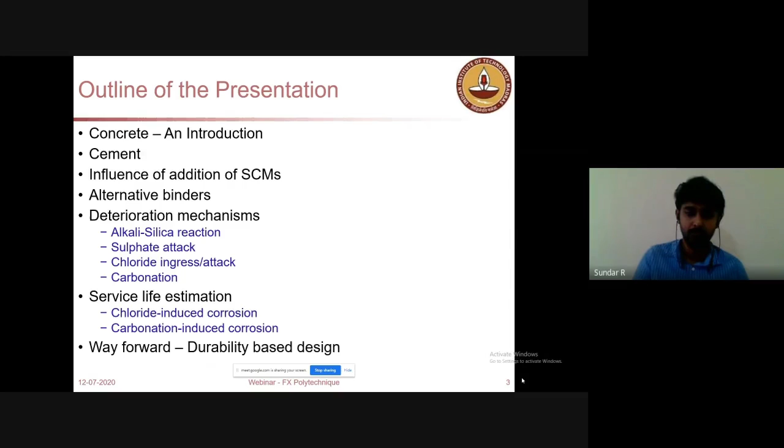Now going to the presentation. This is the topic that I will be presenting today. This outline will be followed throughout the presentation. There will be an introduction about what is concrete and how it is being used widely in the industry, and then I will tell about the most important material in concrete, which is cement. Then I will explain how the influence of additives like fly ash and slag have been improving the properties of concrete, and then I will give some insight on the deterioration mechanisms that affect concrete in the long term, and then I will give some information about service life estimation, how it's done and how it will be useful in incorporating durability-based design of concrete structures.

So let us see, when a trainee engineer enters a site, maybe the first job you will be doing will be concreting, because I got that when I went as a site engineer, and I used to wonder what were the things I should know before going into the concreting business when I joined as an engineer. I would know there will be formwork and it will have steel reinforcement, then I used to check some cover blocks. These are some mandatory checks, like checking the formwork, checking the cover blocks. Beyond that, we will see the batching of concrete, whether it is done properly with weight batching or volume batching, and we will ensure during compaction that vibration is being done. Then after a while, maybe 7 days or 28 days after concrete placing, we will find the cube compression. So this is the routine duty of a concrete engineer at the site level.

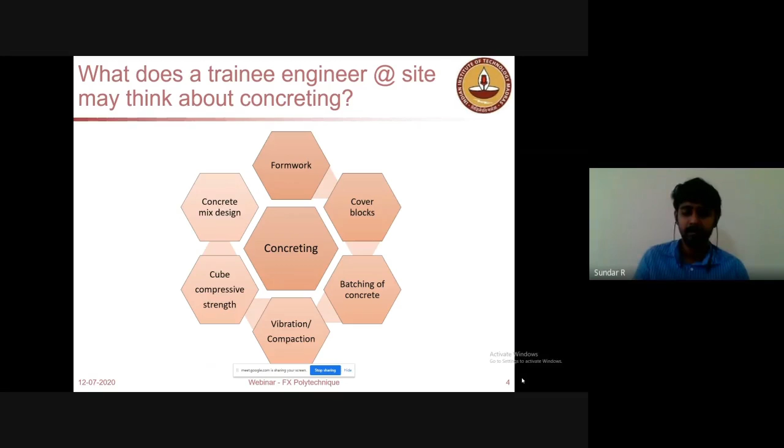So beyond that, what should we know about concrete? When you are an engineer at site, beyond these regular things, you should have an idea about how concrete has evolved over a period of time, and what you should be considering while doing the concreting and during the curing process also. This is very important because concrete is going to last for a long life period. Buildings designed nowadays are for more than 50 years or 100 years. So you should know how durable the concrete is that you have been placing at the concrete element that was designed. Let us move on to the next slide.

Here, concrete is an all-purpose building material. Wherever you go, you will be able to see concrete. Whether it is a power plant, a bridge project, precast elements, or a residential building complex, wherever you go, you will be working with concrete.

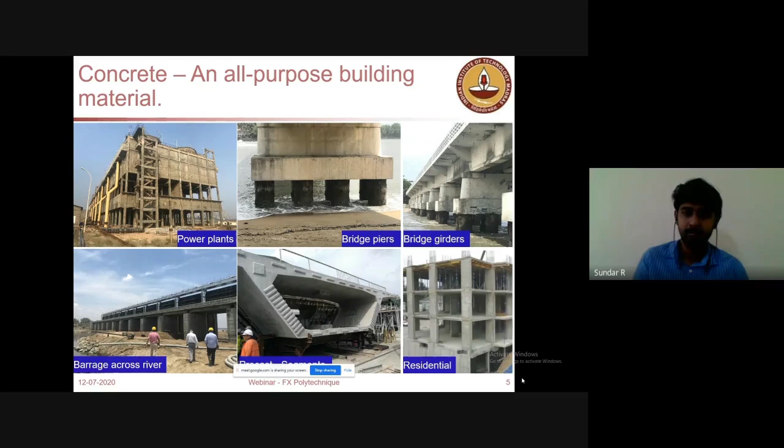So there is no escape in that, especially in a developing nation like India. Concrete is going to be the ultimate building material, which is cheaper, and it is an easy material to make and then place at the site, even with an unskilled labor force under the supervision of an engineer. So why is it a first choice material? As I said, it's a low cost material which could be easily made at site itself.

And nowadays for quality control, we have precast and RMC plants also. So what do they do in concrete? Concrete is a composite material which has a binding medium, and there are fragments of aggregates, so that gives the strength component for the concrete.

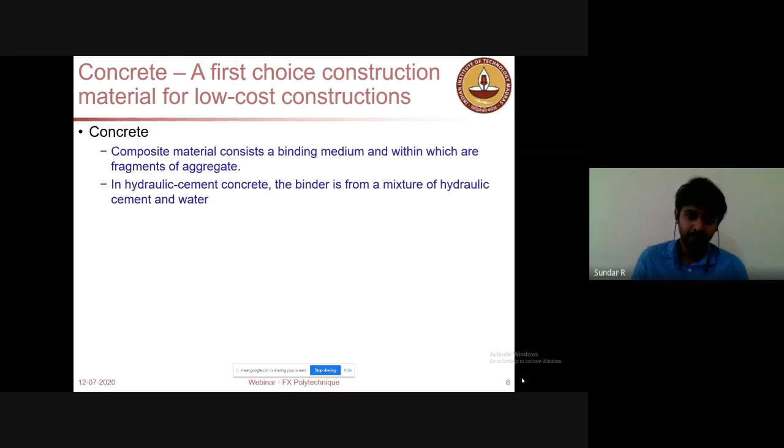And in hydraulic cement concrete - why do I say hydraulic cement concrete? Because the cement reacts with water, and with that reaction the cement paste forms a matrix around this aggregate. So that composite medium gives you concrete which has sufficient strength and durability properties for the necessary service life of the structure.

So what is this binding medium? Over a period of time, the cement industry has evolved a lot. For a longer period, you would have seen this ordinary Portland cement, called OPC. This OPC has been used for a longer period, more than around 200 years, from the 1800s. So this ordinary Portland cement had been the first choice material as a cement.

Then at the end of the 1990s, at the start of this millennium, around 2000, we had some guidelines proposed for reducing carbon emissions. So to reduce the carbon emissions, we went for supplementary cementitious materials. I will tell more detail about it in the next slides.

And then there are now alternative binders. I will explain about that also in a few moments.

And aggregates - there are two different components of aggregates, like natural aggregates, which are now in short supply. You would have heard that fine aggregate and coarse aggregates, which are being quarried from natural resources, are receding. So to save that, we are even going for taking aggregates from demolished structures, as well as manufacturing some aggregates like quarry dust, and manufactured coarse aggregates from recycled aggregates.

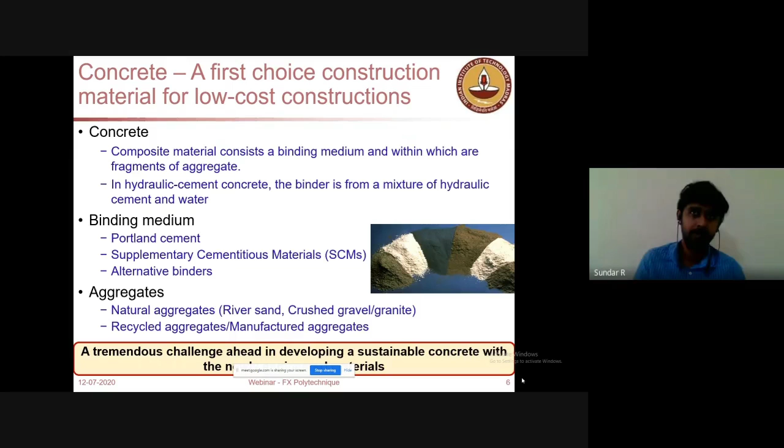So these are manufactured. There are tremendous challenges ahead in developing sustainable concrete with newly engineered materials. So the material is getting a lot of changes. It is being engineered to get maximum output through a lot of combinations and permutations. So we are doing a lot of research on how to make this concrete sustainable as well as efficient. That is what we are going to see now.

So why did we come across SCMs? Why do we have to use these SCMs? If you see, cement production has been accounting for almost 8% of the world's CO2 emissions. This carbon dioxide emission has been a huge challenge, contributing to global warming. So as cement producers, as civil engineers, we should be concerned about it, because we use cement a lot, and we are contributing to almost 8% of the world's CO2 emissions.

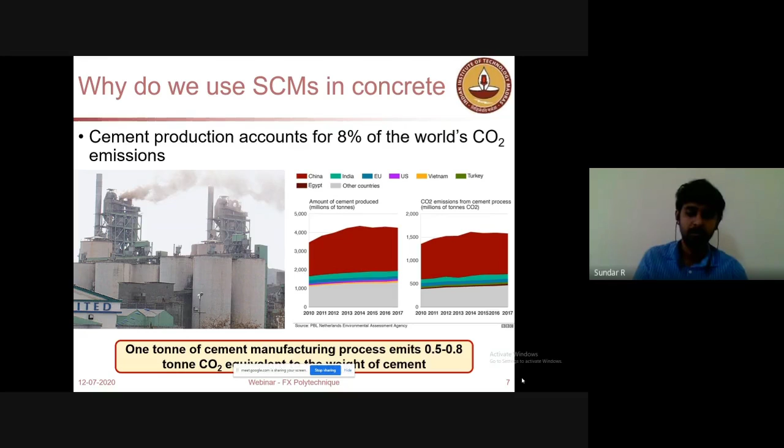Also, if you see, 1 ton of cement manufacturing emits almost 0.5 to 0.8 tons of CO2. This is a huge amount. So you have to see how you could reduce this, because for every ton of cement you manufacture, you are expelling about 1 ton of CO2. That much amount of CO2 is getting out from cement industries.

So what are the choices? When you see how cement manufacturing contributes to CO2 emissions, there are three important processes. During the process, the limestone, which is the major raw material of cement, expels CO2. When you treat the lime at a higher temperature, the CO2 from the limestone, that is calcium carbonate, will expel CO2 and become CaO, lime, and then form calcium silicate during cement production. That process itself emits almost 50% of the CO2 during cement manufacture.

And also thermal emissions correspond to the fuel that has been added in the cement industry, added to the cement kilns, giving almost 40% of the emissions of CO2 from the process. The remaining processes are very minimal, like quarrying, transportation, and grinding.

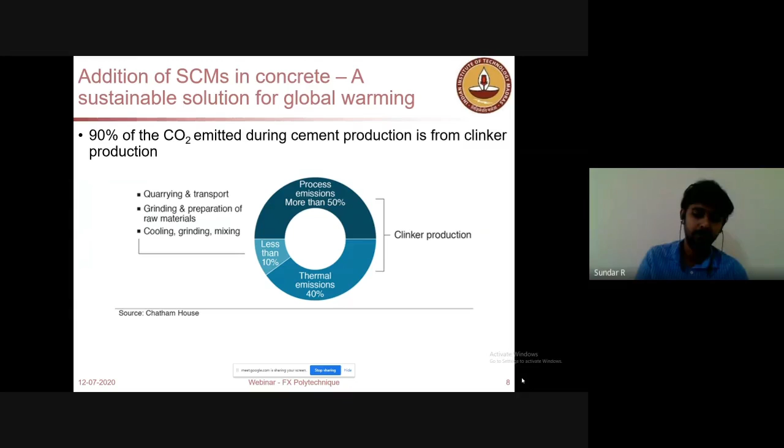So those are very minimal. When you look at this, you could see almost this process itself is contributing to 50% of the emissions. And you can see thermal emission also contributing a lot, but that will be dealt with by using some alternative fuels. But however, when we can, as material scientists and civil engineers, we can have an idea about reducing CO2 by reducing the clinker content through addition of SCM.

So when you add SCMs, you could reduce the clinker. The clinker is the base component of the cement. During the cement manufacturing process, you will get clinker as an end product. That clinker will be ground to cement. So when you reduce the clinker content, you will eventually reduce the CO2 emissions. That is one of the sustainable solutions for the global warming problem that we have been creating.

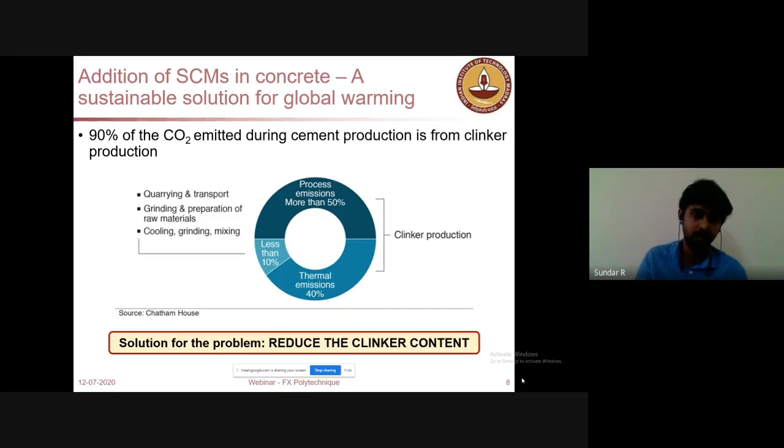So due to that, what we did, so there are a lot of industrial byproducts or waste materials. For example, fly ash is one of the major sources of industrial byproduct or waste material, which is added into concrete or cement as a supplementary cementitious material.

There are tons of fly ash emitted every year through thermal power plants. Even Thoothukudi has a thermal power plant, so you could get a lot of fly ash from the thermal power plant there, and you could use that in cement industries nearby, like in Tirunelveli where you have a cement plant. So from the cement plant in Tirunelveli, they'll get some fly ash from Thoothukudi, and then they will grind it with the clinker they have been producing, bringing down the clinker content, and they produce Portland Pozzolana Cement, PPC.

So you would have heard this term PPC also. Then there's slag cement also - if you go to steel processing industries, you will have slag as a byproduct, and that also has some reactive silica and alumina that will react with the cement hydrated phases, producing calcium hydroxide and calcium silicate hydrates, which are the binding products in the concrete or cement matrix. Similarly, we have waste products like clay and second quality limestone present around the limestone quarries, which could also be added to the clinker to improve performance.

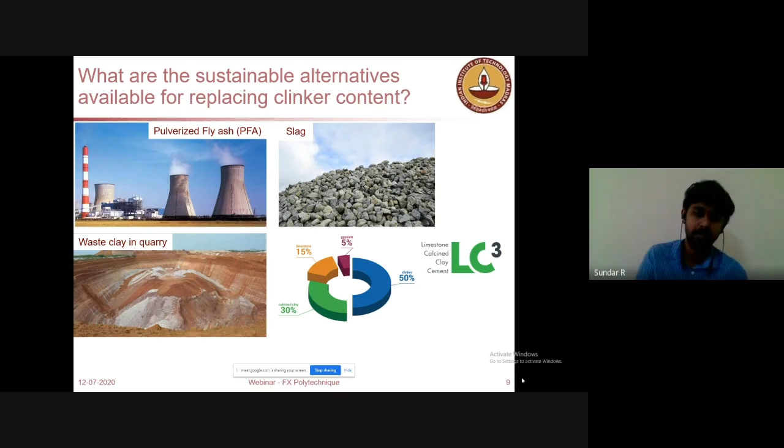So these are some of the research that has been going on, and some positive results have emerged from this method of substitution of SCMs in cement production.

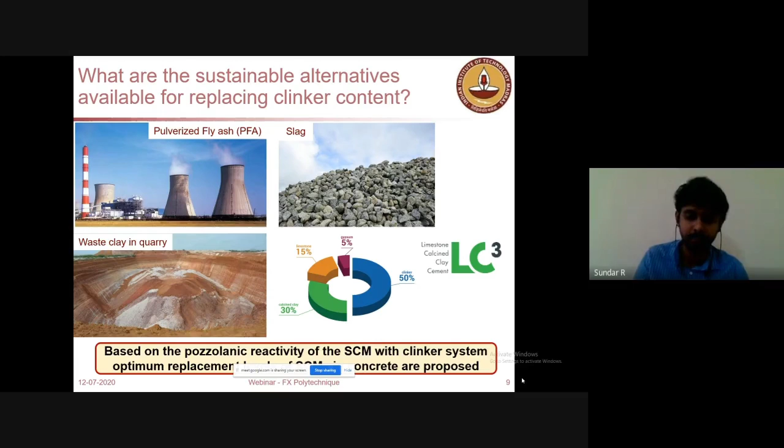So pozzolanic reactivity of the SCM is about how much reactive silica and alumina is present. If you go back and see the chemistry of cement, you will see calcium, silica, and alumina are the three major elements which react and form the binding product. So the presence of this reactive silica and alumina, and their proportion in the SCMs, are the governing factors for deciding how much optimum replacement can be used. That has been researched a lot.

And so now you have to have an idea about how many types of cements there are. When you go to site as a civil engineer - when I went 10 years before to the site, I knew OPC and probably to a lesser extent about PPC, and I didn't know what the difference was. Now I just wanted to give you information about how different they are and how you should be able to make a decision when you come across these cements on site in the future.

So if you see this ordinary Portland cement, now the ordinary Portland cement production has been reduced a lot by the cement industries. Now the proportion of OPC in the market is almost 25% only. This is the traditional cement manufacturing procedure. You will get limestone from the quarry, and clay from nearby quarries, and you take both and go for a process called calcination.

So preheating will be done. Then after the preheating, the clinkerization will happen in the cement kilns at a very high temperature of 1400 degrees centigrade. That is a very huge temperature, and it needs a lot of fuel to burn, which corresponds to a lot of CO2 emission also. So then finally the clinker will have these bogue compounds. In concrete there are bogue compounds which are tricalcium silicate, bicalcium silicate, and tricalcium aluminate. Bicalcium silicate and tricalcium silicate are the major ones - C3S and C2S are the major raw materials used to bind the cement, used as binding material.

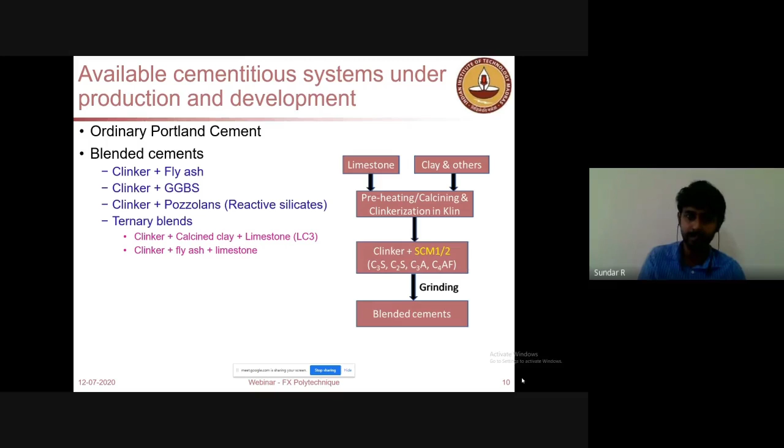Similarly, when we go for blended cements, these are cements like PPC and PSC, like Portland Pozzolana cement with fly ash, and Portland slag cement with GGBS. Additional pozzolans are also available, like volcanic tuff, which are also having reactive silica, so they also will be used for pozzolana cement.

And we have some, so these three are binary blends, and this is the ternary blend which is having 2 SCMs. So you could see either one or two SCMs added to the clinker after the regular cement manufacture process, and then it will be ground to form the blended cement. So this is how blended cements are made.

And there are alternative binders. These alternative binders are made up of materials which are out of the regular manufacturing process, or the process involved in making concrete will be different. So somehow there will be a difference either in terms of process or in terms of material while producing a binder. Here, if you see this geopolymer, you would have heard this word quite frequently in the last 10 years, and maybe you will be using some geopolymer applications later. So here it will be mostly devoid of OPC.

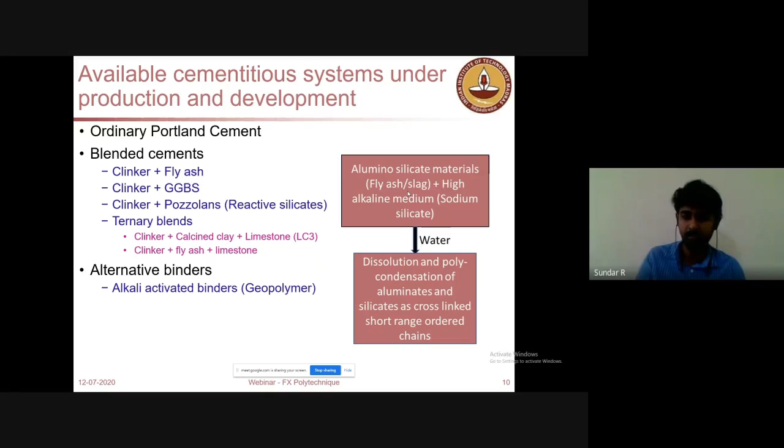So they mostly use fly ash and slag, and then they will keep them in an alkaline medium. That alkaline medium in combination with these aluminosilicate materials, essentially slag and fly ash, will polymerize and then form this cementitious material, that is geopolymer, and calcium sulfo-aluminate cement.

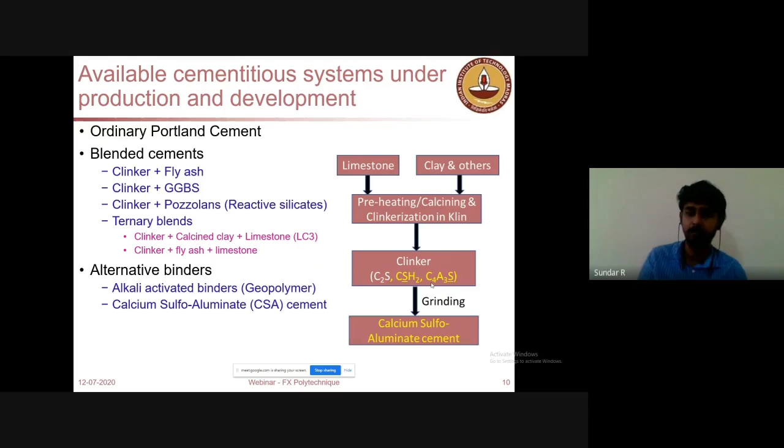Here also the raw materials are almost similar, but the process of cement manufacture will be different. Like Ye'elimite is one of the products, like C4A3S is Ye'elimite. So the phase compounds formed in CSA cement are different from what is formed in OPC. This Ye'elimite is produced at a much lesser temperature, and due to that, much lesser heat will be generated through the fuel. So that's how the cement manufacturer will have lesser CO2 emissions. So that is one suggestion for alternative binders.

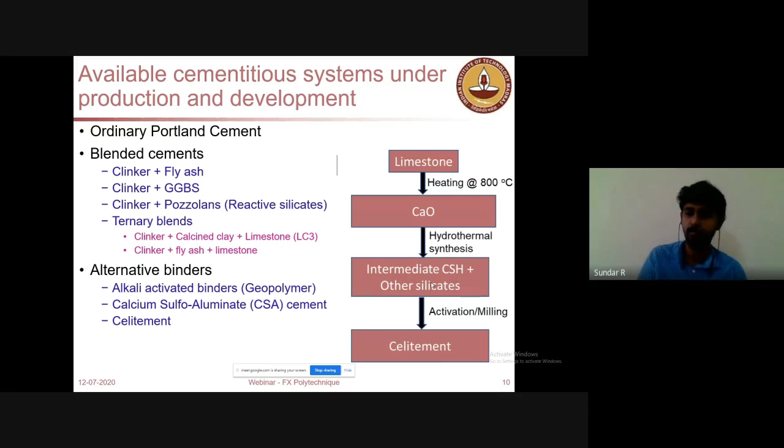And Celitement, this is another cement where the entire process will be different. Instead of clinkerization, they will go for autoclaving, that is a hydrothermal process where cement will be manufactured. Similarly, magnesium silicate cements are also there, where the raw material will be entirely made up of magnesium silicate.

So until now, you have seen cements based on calcium and silica. Here, the cement raw material is a magnesium silicate, which is a green colored rock, something like olivine or serpentine, which are available in the earth's crust, somewhat lesser than calcium, but still widely available. So that could be one of the alternative cements.

So when you come to some special purpose cements, you would have heard something like sulfate resistant cement, or even rapid hardening cement. These are special purpose cements that will be useful in some specific applications, not everywhere. It could be manufactured in a limited content. So you have a wide variety.

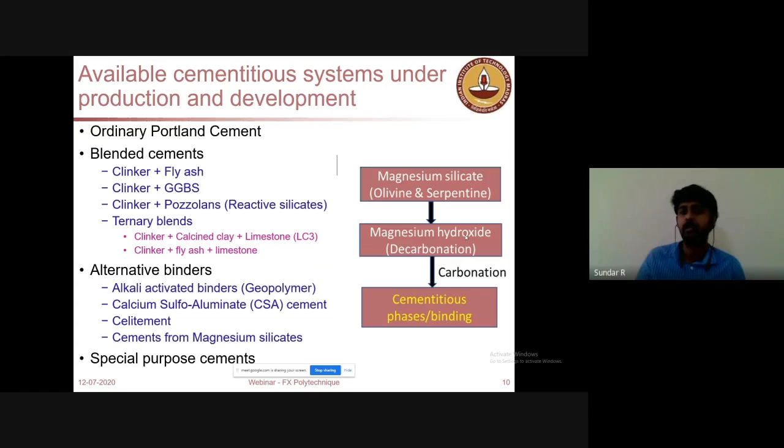Like when you go for a project, maybe a huge infrastructure project, even in a single project, you could be using different types of cement. So you should be aware of that, and you should be taking necessary measures to have better durability, durable structures at the end of the casting or construction process.

So now we will see what are the significant benefits when we add this SCM. So whether addition of SCM is giving us some benefits, because when we add some material to the concrete, we should see whether it is giving some benefits to us. Otherwise, adding that is not a sustainable option.

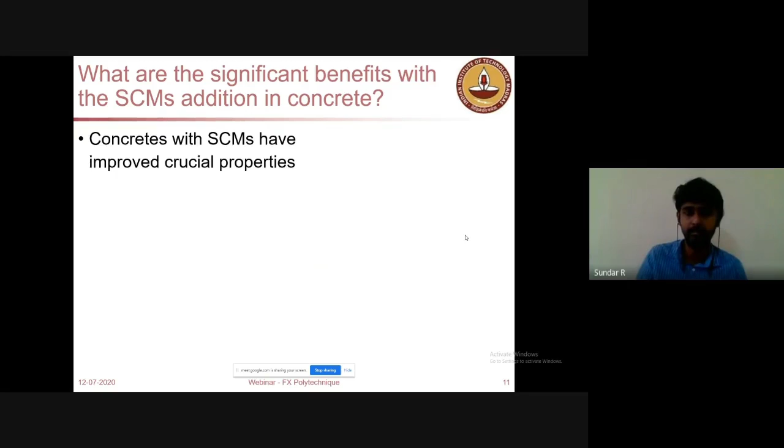So there is one negative aspect of SCM, that people would say that it is not achieving enough strength at an early stage. For example, for a pre-stressed concrete system, where you may need an early strength necessary for your pre-stressing process and all, there might be a shortcoming.

But still, when you go for a long-term assessment, this concrete with SCMs outperforms OPC every time. Like if you see here, when the replacement level is under 30 and all, still you could see a better performance with fly ash addition or even slag addition than OPC at 90 days or more than 1 year strength. If you see, OPC is having lesser ultimate compressive strength than this Portland Pozzolana cement.

At the early stage, OPC will have much higher strength than these cements, but we shouldn't judge it with 28 days strength. So you should be aware of that. When you use concrete with SCMs, you shouldn't judge it by taking the measurement at 28 days.

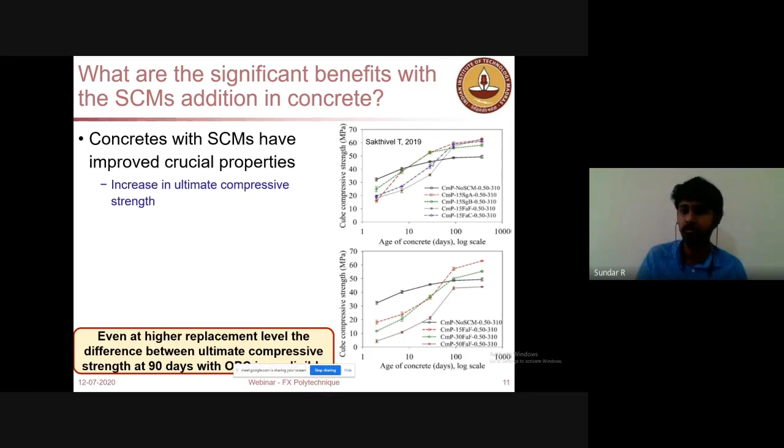You should at least give some time and then see whether you have enough strength. At 90 days, you could see some of the mixes performing better than OPC. You should know that when you use cement with fly ash or slag, it reduces a lot of heat of hydration. Lot of heat generation happens as an exothermic process during hydration in concreting, and that could be reduced when you use SCM.

So for a massive structure like a dam, if you use concrete with fly ash or slag, you will generate less amount of heat. Control concrete and fly ash concrete have much different heat emission. The temperature changes way below in fly ash concrete in comparison with control concrete, that is ordinary Portland cement.

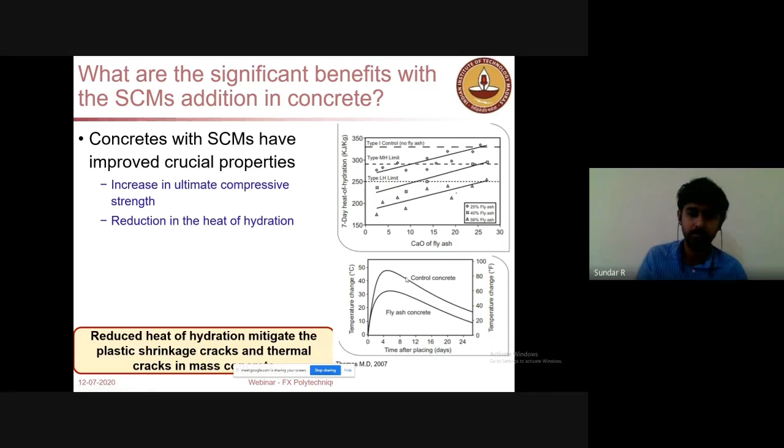So the reduced heat of hydration can avoid plastic shrinkage and thermal cracks. That was a huge problem earlier. When you go the next day after construction and see cracks on the concrete, there will be a huge dispute between the client and the contractor. So it is one of the huge issues. When you add SCM based concrete, you won't have some of those issues.

Then there is higher resistance to chloride, oxygen, and moisture. This is the most important point regarding durability. Some of the critical elements on earth which could be harmful for concrete are chlorides, oxygen, CO2, and moisture. If you have a concrete which has lot of pores and which could absorb these compounds or elements, that could eventually lead to issues with respect to durability. I will explain later about the durability issues that happen.

If you add SCMs to these concretes, the durability improves. If you see concrete with very high addition of fly ash and very high addition of slag, for example 50% slag and 30% fly ash, it has very good resistance to chloride conductivity. Concrete with 50% slag and 50% fly ash has very high resistivity to chloride. Also when you see the surface resistivity, slag with high volume replacement and fly ash with high volume replacement stand alone, and even 30% replacement of fly ash gives very high resistance to the entry of this ion.

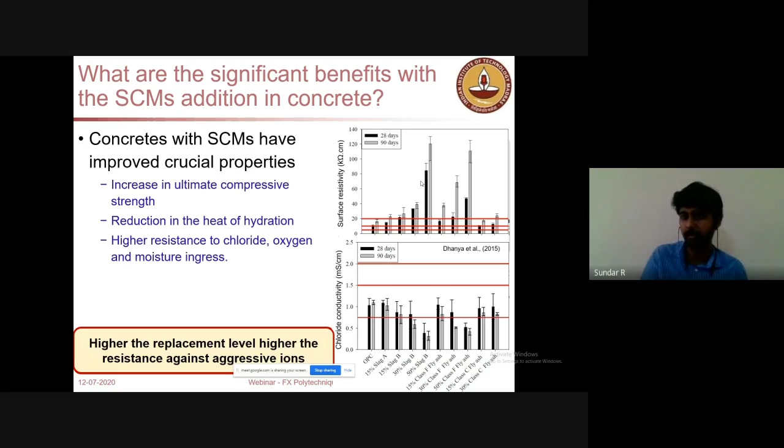So this high resistance to the ion is very much important from the point of view of durability. Next we will see how CO2 emissions are being controlled. The main purpose of adding SCMs initially was to reduce total CO2 emissions, and that has been solved by adding SCM.

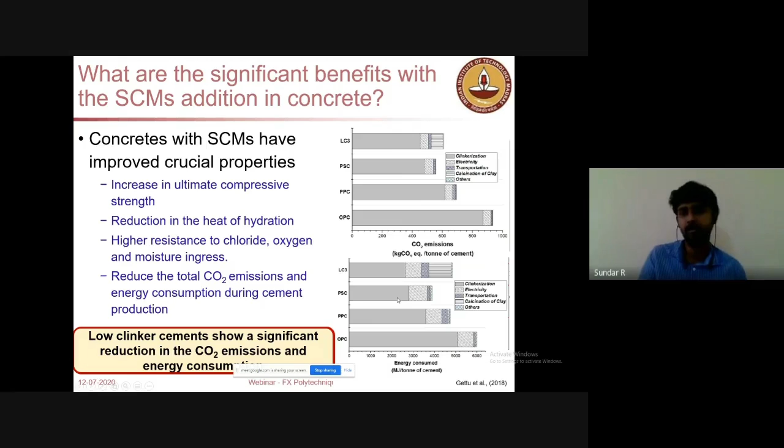If you see regular OPC and PPC, and then Portland slag cement and even some new cements with elements like limestone, calcined clay cement, you could see the blended cements always showing much lesser CO2 emission than ordinary Portland cement. Energy consumption during cement manufacture is also very high for OPC, and it's been reduced for mixes which are PPC, PSC, and LC3. So this is the addition of SCM that has been observed in our industry.

Now we will see what are the deterioration mechanisms in concrete. This is very much important because you need to think about long-term durability when you choose a material. There are physical causes for deterioration in concrete as well as chemical causes. The physical causes are predominantly due to erosion, abrasion, and cavitation. This surface wear can be observed.

Concretes which are in the spray zone or splash zone of water, or somewhere like concrete roads which will be severely eroded and abraded by the tires running over them, there you should be considering the physical causes of deterioration and take some adequate measures.

Similarly, some cracking happens due to the crystallization of salts, and these deteriorations are not having any chemical reactions happening inside the concrete. Some adequate warning will be given through cracking or surface wear, so this physical cause of deterioration can be dealt with caution by providing enough resistance against surface wear and cracking, or even by making an impermeable concrete cover, which we will see later.

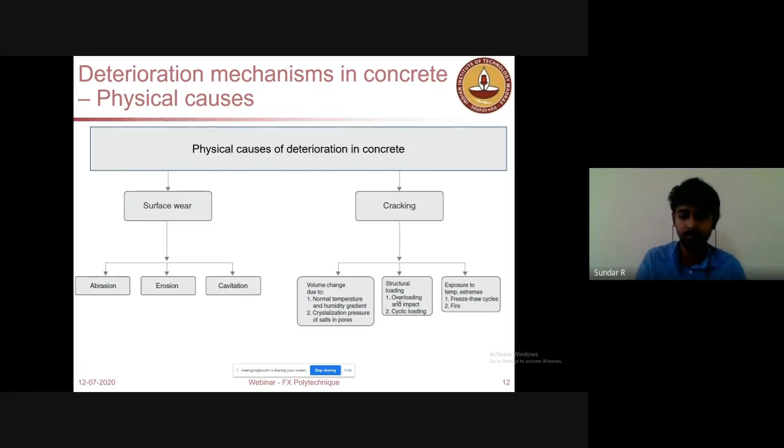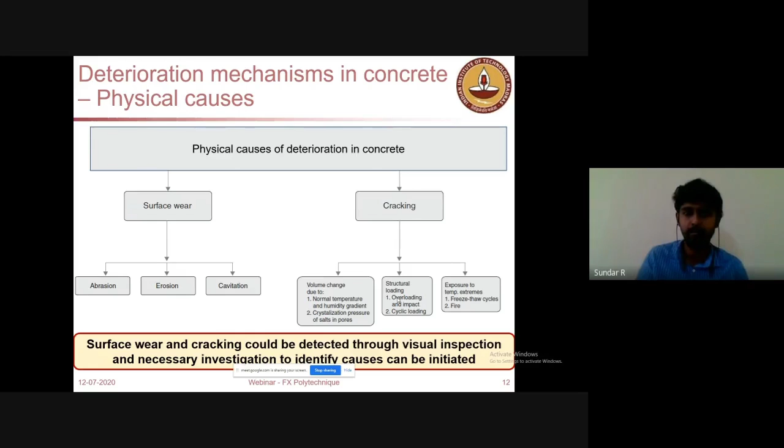Surface and visual inspection can be a tool, and it could be identified easily if there is a cause for this deterioration. Chemical reaction is very critical because we don't know the profile of available deterioration elements in a particular location. We don't know how much chlorides will be present exactly, and how it will vary over a period of time.

Similarly, we don't know how aggressive the leaching water can be. Water near industry zones will have very aggressive ions that could interact with concrete by replacing calcium, creating leaching in concrete. Since we don't know these things, we should be prepared at the material stage itself, and be able to tackle the problems until the desired service life that we intend our concrete to achieve.

Some major effects due to these causes are loss of mass and loss of alkalinity. Loss of alkalinity will lead to corrosion, loss of mass will lead to deterioration, and cracking and spalling will be dangerous in a structure. When a structure is at the stage of cracking and spalling, you could see how dangerous it is to go near it regularly. So it should be taken care of - there shouldn't be any of these problems due to chemical causes during the service life. Our concrete should have enough resistance against all these problems during its service life.

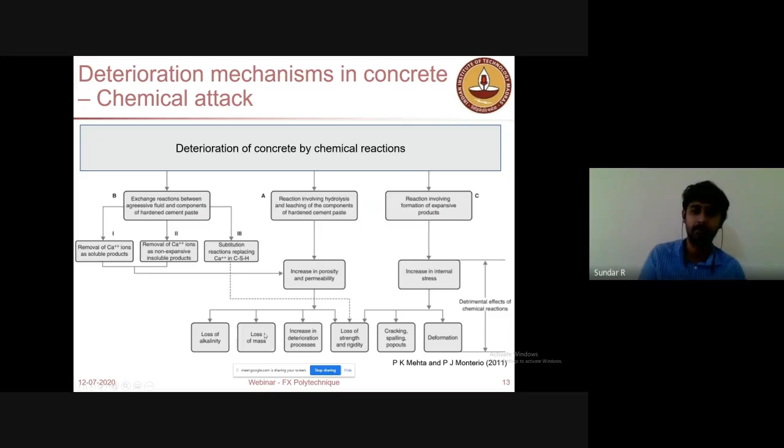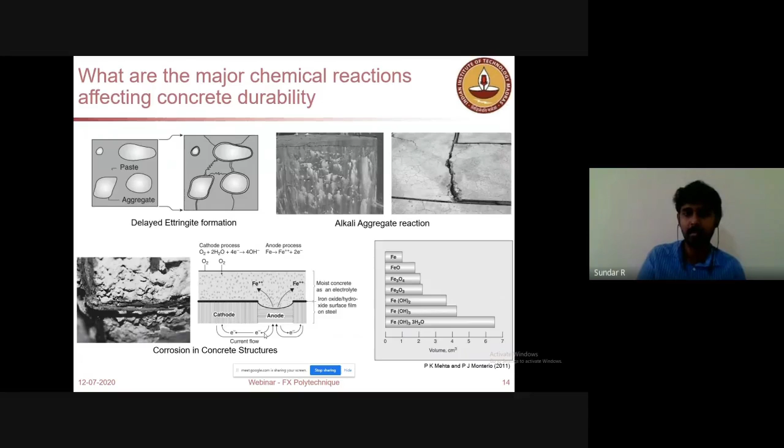So then we will see some of the processes as such - delayed ettringite formation, which is a form of sulfate attack, alkali aggregate reaction, and corrosion in concrete structures. We will see these in detail.

So what is sulfate attack? I am focusing mainly on this chemical reaction because physical deterioration mechanisms could be dealt with by site inspection and visual inspection, and we could take necessary action. But chemical reactions that cause deterioration must be tackled during the material selection stage itself. We should know the environment and design our concrete for maximum durability.

Now for sulfate attack - this is due to sulfate presence both externally and internally. When the cement matrix has a source of sulfate, that sulfate will react with some hydrated phases and form the expansive product called ettringite. This ettringite will create micro cracks inside the cement matrix and reduce the strength.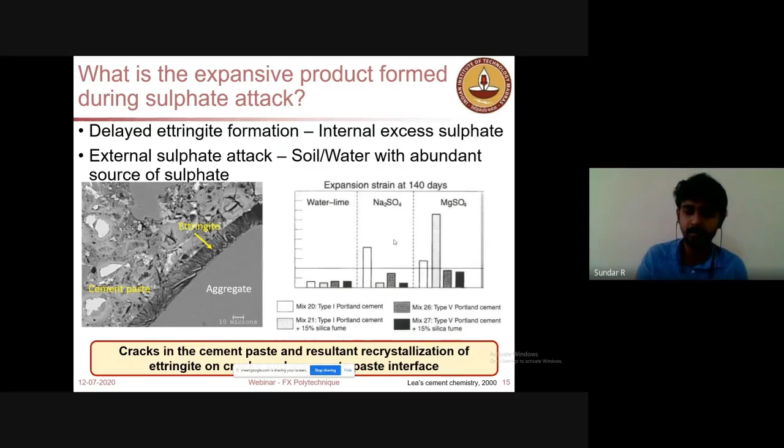However, when we use sulfate resisting cements, that is type 5 cement, you will always have an expansive strain which is well within the permissible limit, as explained here. As a result, you could see cracks in the cement paste, and recrystallization of ettringite causes the deterioration. This is one form of deterioration in concrete.

The next one is alkali silica reaction, which is predominant in locations where the aggregates are more reactive. Reactive aggregates have some strained form of silica, which will react with our concrete and then form some silica gel.

If you see here, these cracks are pertaining to ASR, and these white dots are the silica gel which was formed and magnified. This formation of silica gel is an expansive product, so it will expand and create cracks inside the concrete. That will also lead to pop outs from the concrete surface and D cracking, and due to that there will be material mass loss, and finally due to the higher expansion with reactive aggregates, there will be deterioration.

This will be very much predominant in cements with higher alkalis. The silicate from the aggregates reacts with alkali in the cement when there is an abundant supply. So when we have a low alkali cement and reactive aggregates, you will observe much lesser expansion. But when you have a high alkali cement and a reactive aggregate, the situation will become dangerous.

So when you work in a certain area, if you came to know that there is a high alkali cement that you are using based on the material assessment, as well as when you suspect the aggregates will be reactive, you should be careful about this ASR.

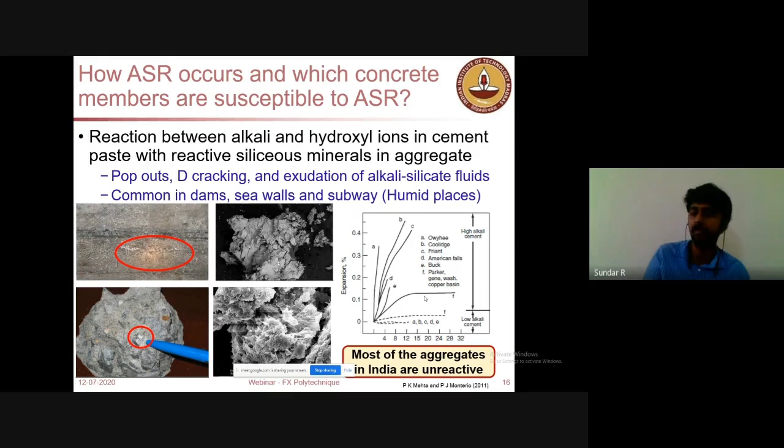However, this is very common in dams, seawalls, and subways. But in India, the aggregates are mostly unreactive. But when you work away from India, you should be careful to know at least whether the aggregates are reactive. So other than that, another major deterioration mechanism here is corrosion.

There are two processes by which corrosion can happen: carbonation-induced corrosion as well as chloride-induced corrosion. The carbonation-induced corrosion is primarily due to the reaction of atmospheric CO2 with the cement phases. Due to that, there will be a reduction in the alkalinity, and because of that, there will be corrosion that has been uniform in the process.

If you consider this carbonation-induced corrosion, the steel will be corroded uniformly throughout the cross section of the concrete member. But when you go for chloride-induced corrosion, the failure will be a localized one.

There will be an increased concentration of chloride at this juncture. The chloride will come through the concrete and then reach the steel level. When the amount of chlorides present at this steel level increases to a certain level, that can initiate corrosion, and then it will go on, creating higher mass loss. Due to that, the failure will be sudden.

So when you are working in zones prone to chloride-induced corrosion, you should be careful about it, and you should make your concrete so much denser that chlorides shouldn't penetrate.

However, in carbonation, the corrosion mass loss will be uniform, so there will be sufficient warning before the failure. In pre-stressed concrete and such, chloride-induced corrosion will be so catastrophic that it may lead to sudden failure. Pre-stressed concrete can come down suddenly if the strands inside were affected by chloride-induced corrosion.

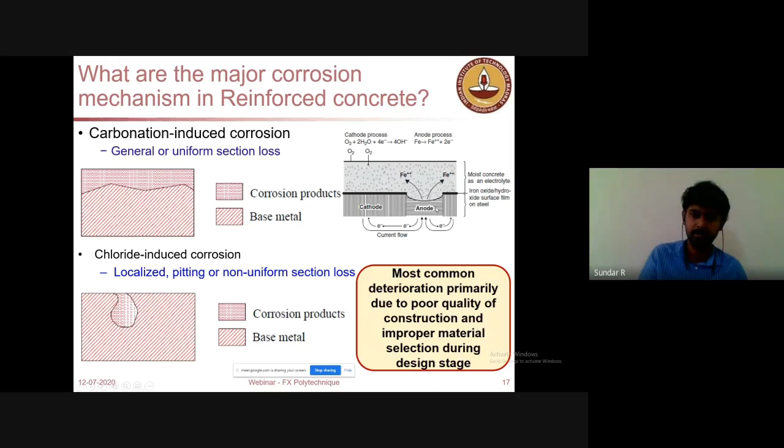Here you could see the anode is the steel member, and there will be a cathode, which is a portion that is not corroded, and due to this electrolyte concrete, the corrosion is happening. This is a very common problem that you will be seeing everywhere.

Even as a maintenance engineer, you should be able to say a solution for this reinforcement corrosion when you are practicing. This will be a lot of maintenance and repair problems that you will face when you go for practice as a civil engineer.

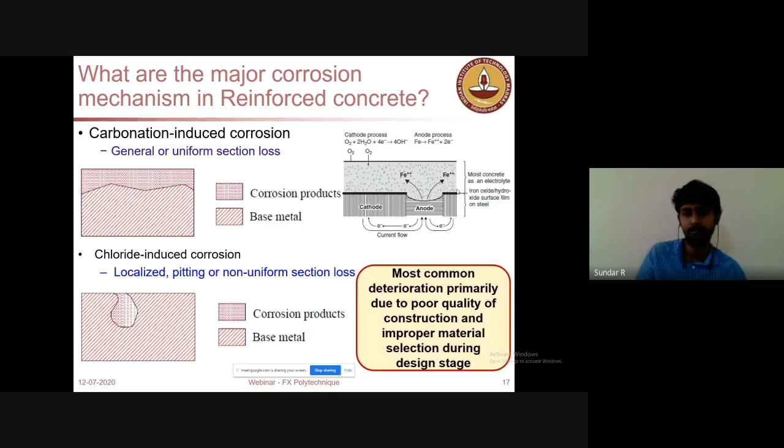So now let us see what is this design for durability. Every time when you see a design for concrete or design for steel, the entire process that you study in the course is going towards strength-based design. So you will know how much force is coming over the member and how the internal stresses are developed, and you will give a concrete or steel section and a detailing.

For example, here you are giving a detailing for a concrete member with necessary steel reinforcement, stirrups, etc. So you are doing very well design for a strength-based design. But you should be aware of how this durability-based design also can cause a significant impact, because most of the failures that have been happening in structures regarding serviceability are primarily due to the durability issues.

So a lot of issues comes up, like when you see a crack due to corrosion, when you see members fail within 10 or 12 years from a building due to corrosion. So that has become a concern for people now. People are worried to live in a structure which is showing that it is corroding faster, or even other kinds of failures like sulfate attack and ASR. So durability has been a key concern now. So now people start to think about how to include this durability into the design process also.

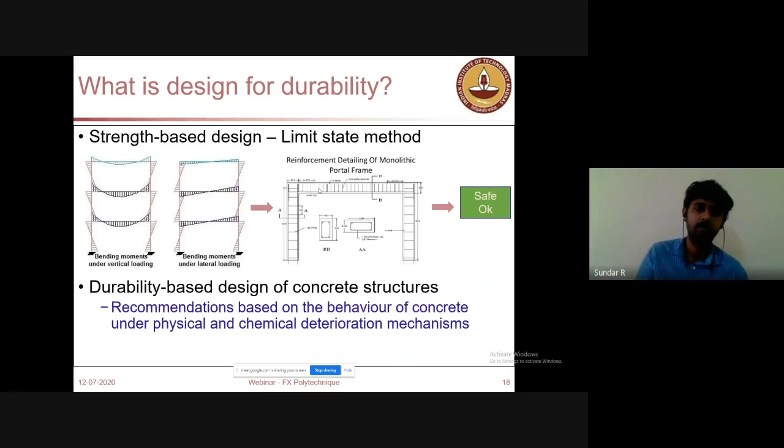So there are two different approaches for how durability design can be applied. This durability based design as a prescriptive base is not a new concept, it has been in the codes. Even in IS codes, you would know, like IS 456 or IRC codes for concrete, prescriptive based specifications are available. For example, the minimum cement content and maximum water cement ratio for a particular exposure condition. For a mild condition, you need this much cement content, this much water cement ratio. So this is the prescriptive base.

So the thinking is that giving these prescriptions can ensure the necessary or minimum durability required for sustaining the service life of the structure for the necessary time period. That is called deemed to satisfy. You are going to design a structure and you think that whatever suggestions you give for minimum cement content and maximum water cement ratio is going to work for achieving the exact service life that you have been thinking while designing the structure. So that is a prescriptive based approach, and we will see examples of that in the codes.

And performance based approach is where you have to give some performance indicators to the contractor who is going to execute the job, and then you must ask the contractor to demonstrate this performance by the concrete that has been cast at site. So you have to cast the concrete at site and take some concrete cores, or even take dummy specimens, and then see whether the performance specifications are also being met. So that is the performance based design.

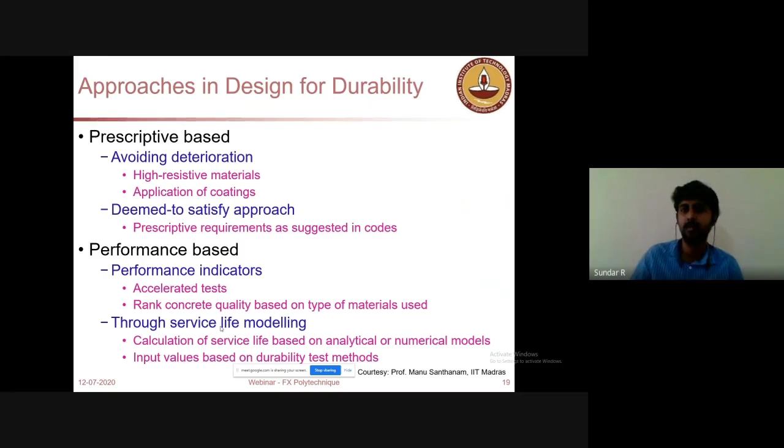Maybe there is a new material which is coming for the construction, so you may not know. So for that, if you know some of the properties, and if you are able to get the service life for the material through models... because long-term tests are very limited, so we don't know the long-term performance of any structure without testing for a period of time. So we will do some modeling. We will do some service life models for the deterioration process, and then it will be based on the inputs that have been derived from the durability tests.

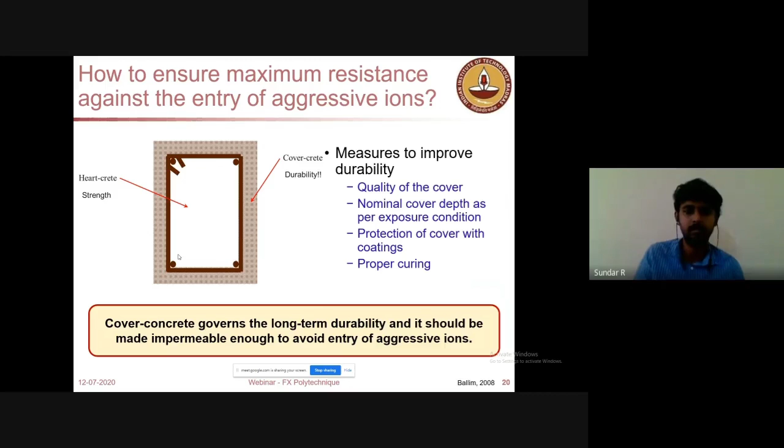So we will see how to ensure the maximum resistance against the entry of ions. To improve durability, we should have a quality cover. If you see, the strength of the concrete will be pertaining to the heart concrete, that is the inner portion which is wound up by reinforcement in the RCC, and cover concrete is the governing factor for the durability. So the concrete should have a very good quality cover, and the nominal cover which is necessary for the specified exposure condition, and it should be having protective coatings otherwise. If there is inadequate cover, you should have a protective coating, and it should be properly cured. For example, the concrete with SCM should be cured for a longer time, etc. So we have to make this cover very high quality, and then it should be governing the long-term durability.

But when you have inadequate curing, for example, when you are at site and dealing with a PPC or PSC, and if you don't cure your concrete properly, you could have a curing affected zone, like up to 30 mm. It has been identified as affected by curing mostly, when there is drying happening, if it is not sufficiently cured, this concrete will not achieve the necessary durability properties, like much denser concrete here.

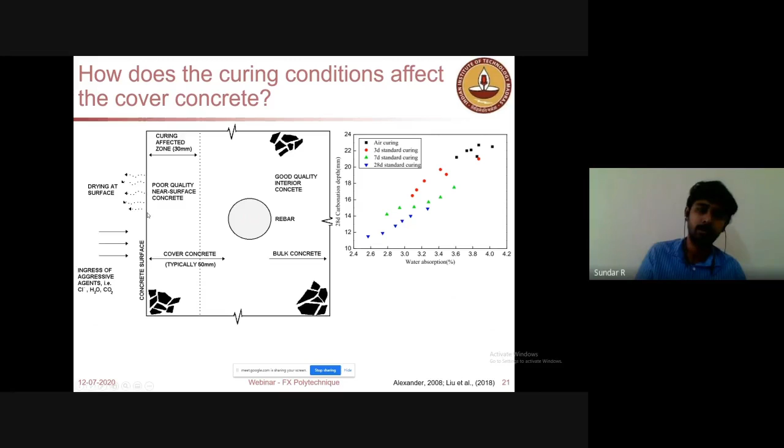So there is a chance of having a poor loose compacted concrete here, so curing has become of prime importance in concrete with SCM. If you see this set of concretes, when cured without any curing, you could see there is a very high carbonation depth at a given time of testing. And if curing is extended to 28 days, you could see the water absorption is also reducing.

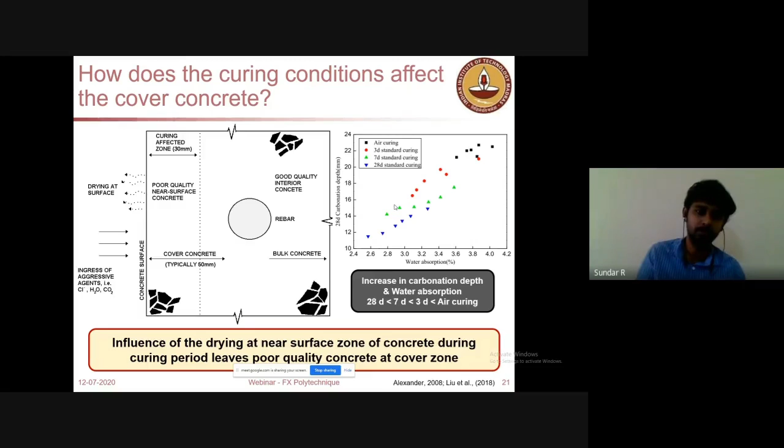Water is also one source for corrosion, and CO2 is another source. So when you have sufficient curing, you are able to reduce the risk of carbonation induced corrosion, as well as other forms of deterioration, because water absorption is a primary source for sulfate and chloride salts also. When you cure for sufficient time, you get a good quality cover at the surface, which reduces problems with respect to durability. This is very important, and we should be taking care of it.

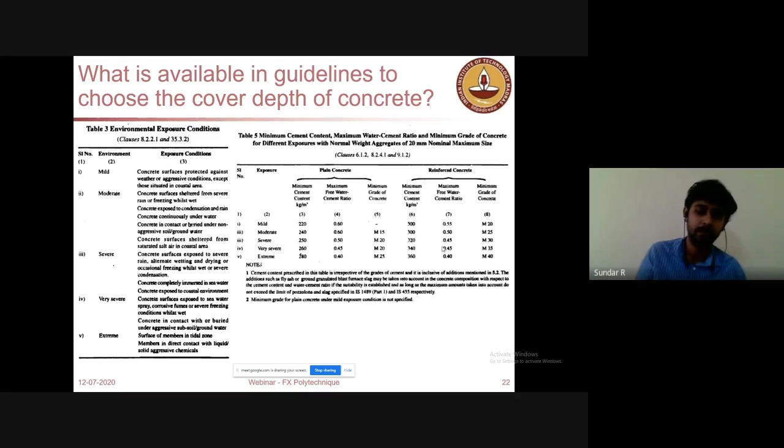information on whether this will be applicable for all the new types of cement that we have been discussing. There are a lot of new cements coming up. Whether this number, which was primarily based on OPC, PPC, and slag based cements, will be working for those kinds of cements also, we don't know. That should be given. So this prescriptive approach may not give any assurance on the performance of the new mixes which are going to come to the market.

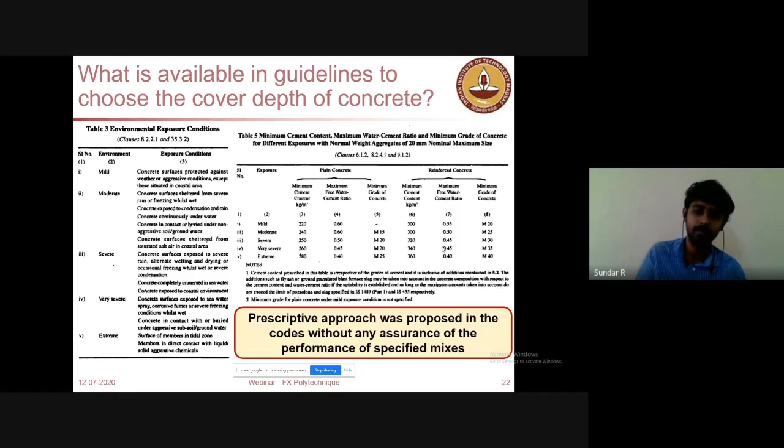Similarly, there are requirements for sulfate attack also, but still it is again the minimum cement content and minimum maximum water cement ratio, so there is nothing we could know about new concrete. Similarly, for concretes at seawater also, there is a specification regarding the minimum strength grade which can be used, but there is no information to assess the concrete after casting, whether it has sufficient resistance against the ingress of these harmful compounds or elements for the steel embedded in concrete as well as the cement matrix.

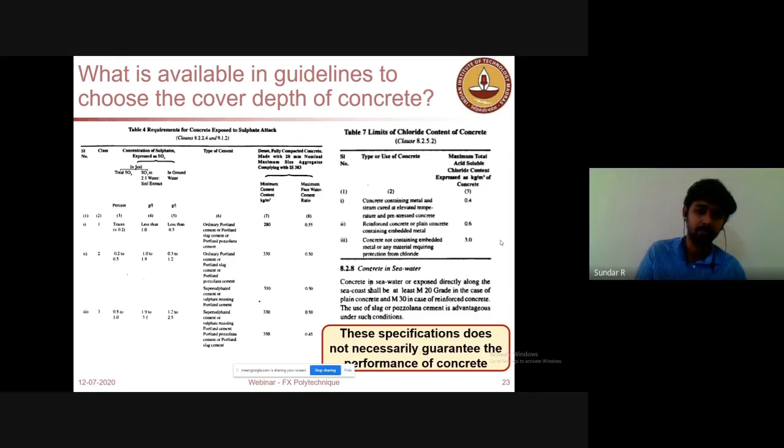So here, this is the limit for chloride content. There also they didn't specify anything pertaining to the type of new cements, how it could vary, because the new cement has a different chemical composition or chemical phase composition, which is not similar to what OPC or PPC has. So this again is not specifying or guaranteeing the performance of the concrete.

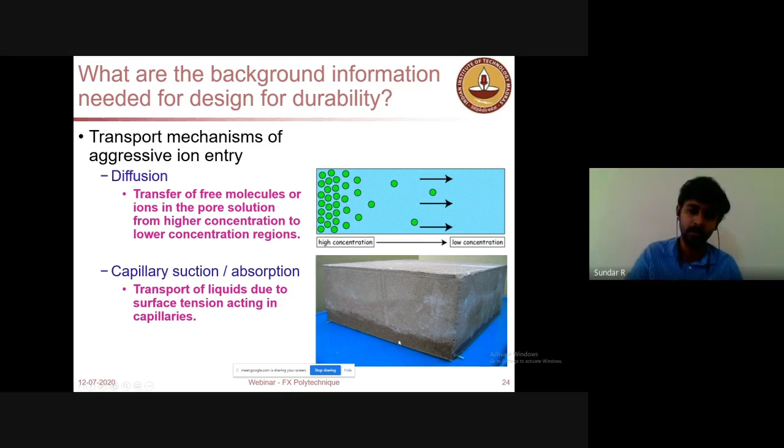Similarly, capillary suction or absorption: when the concrete is sufficiently dried for a period of time, but when it suddenly comes in contact with water, you could see there is a sudden ingress, a sudden pull for water to enter through the pores, and that will bring some salts into the system. So when we have salts like sulfates and chlorides in the water, that will also go into the concrete with this sudden capillary pull.

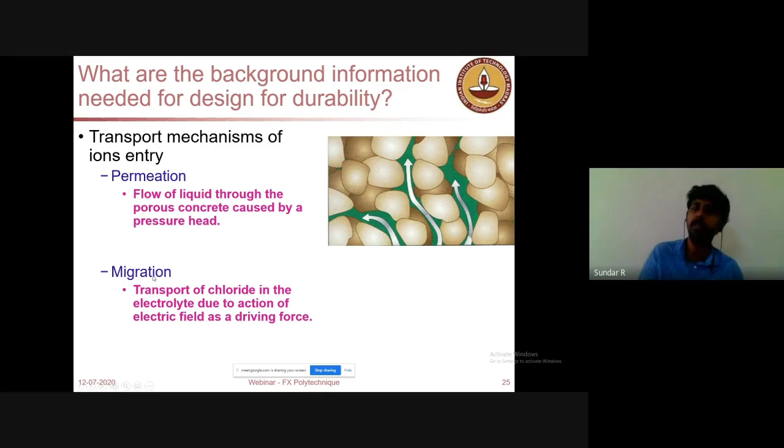Then again, permeation. This is again under pressure, so when water enters through some pressure, there will be a permeation. And then migration, which is under an electrical field. This permeation and migration testing is primarily for accelerated test conditions, which would be related to the natural condition.

So here these are some of the performance indicators corresponding to the deterioration mechanism. When you have to worry about moisture ingress in a particular location, you should be checking water permeability as well as sorptivity based on the standards available. And also when gases enter, like oxygen or CO2 into your concrete, you should have necessary specifications indicating the performance of concrete against this entry of gaseous elements like CO2 and oxygen, which is again necessary for corrosion.

Similarly, for carbonation, we have an accelerated carbonation test. Similarly, for sulfate attack, mass loss and expansion could be characterized by some tests, and then we will have that as guidelines for performance of mixes against sulfate attack.

When you have concrete exposed in a region where sulfate attack governs deterioration, you should check whether the concrete to be used has sufficient resistance against sulfate attack. So you should choose the material right before construction to avoid the sulfate attack problem.

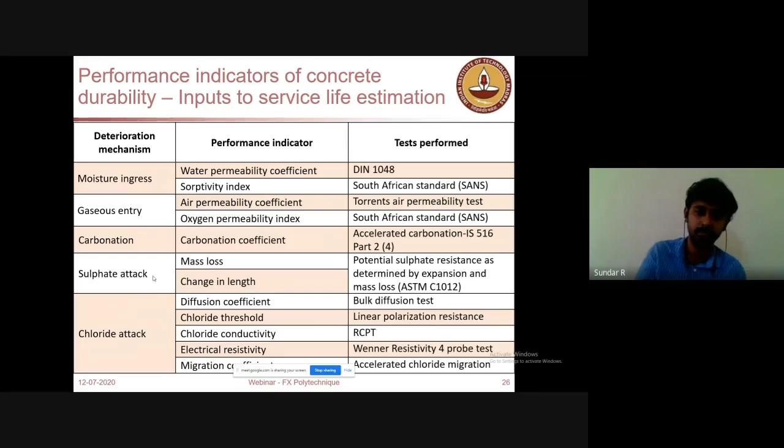Similarly for chloride attack, we have numerous tests which could be useful, like diffusion coefficient, which is the natural ingress of chloride into concrete based on concentration variations, and chloride threshold, which is the minimum amount of chloride required for initiation of corrosion. I'll explain these further in later slides.

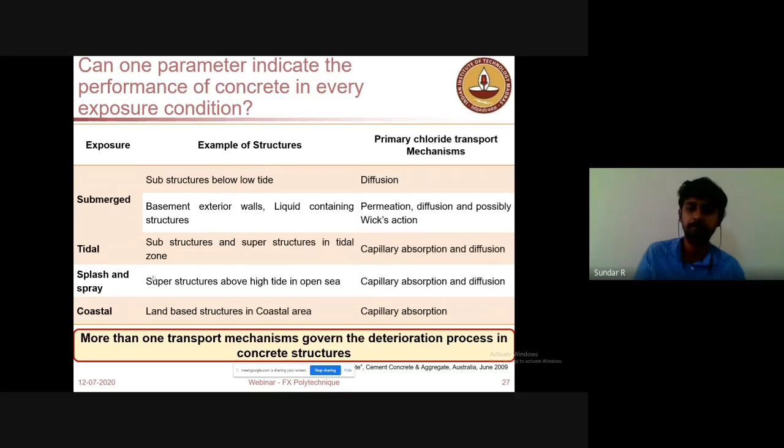Now, can one parameter be enough? In different exposure conditions, we may have 2 to 3 mechanisms which govern the performance of concrete under long-term durability issues. So we have to see whether the governing transport mechanism is one or multiple, meaning we may need multiple parameters. Just one performance or durability indicator will not be sufficient to give an idea about the long-term diffusion process, because due to seasonal changes, availability of salts in the environment, and water, there will be changes. So we have to define criteria based on multiple performance indicators.

So when you have concrete in a permanently submerged condition, you should define a strength criteria with a minimum strength to be used, and also have 3 to 4 durability indicators which the concrete placed in a permanently submerged condition must adhere to. When executing such concrete, you should consider all these numbers.

When you test after a sufficient curing period, or after 1 or 2 years of inspection, the concrete at the site should have this amount of performance expected to give the intended service life. So when you need a particular service life, say a 50-year service life in a tidal zone, you should always have a surface resistivity greater than 50 kilo ohm centimeter.

This has been put forward to the codal committees, so our next revision of IS 456 will have some of these numbers. When you go to a site as an inspector, you should have an idea about these numbers which will be present in the codes, primarily based on performance-based specifications.

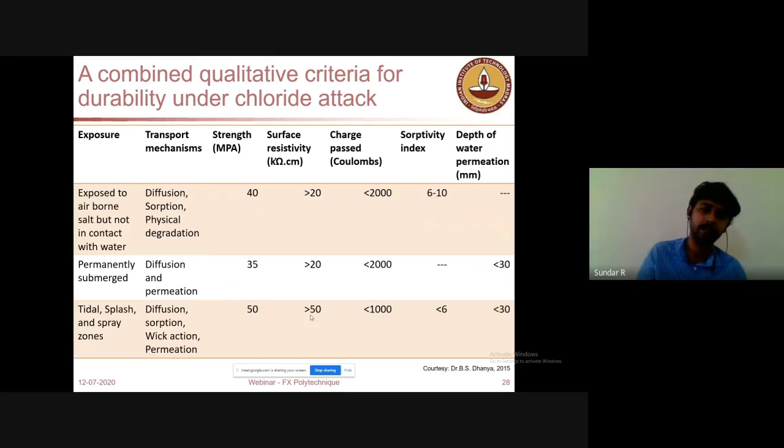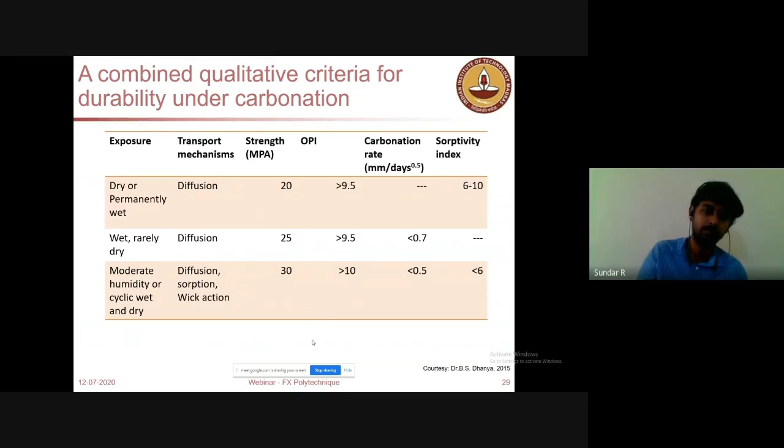These numbers will help you decide whether to accept or reject the concrete at the site for deciding quality. Similarly for carbonation, there is oxygen permeability index and carbonation rate, which have been used as measures to determine durability, in addition to the strength criteria that has been proposed. So for achieving the intended service life, we should have these kinds of qualitative criteria for durability.

However, this is an instantaneous measurement. Yes, you get performance indicators at a particular time, but you may not know how the pore structure of the concrete is evolving. Concrete always has some moisture with it, so there will be continuous hydration and continuous pozzolanic action. Eventually the concrete will either get denser or get leached out due to external influences, and the pore structure will be changing always, and the environment also will be constantly changing.

When you see the CO2 levels 100 years before, it was almost 100 ppm lesser than today, like 300 ppm in the 1900s is now up to 400 ppm in the 2000s. So the environment is also changing, the concrete is also changing. The measurement at one moment may not be sufficient to predict the long-term performance.

That is why we have to go for a probabilistic service life estimation. What is probabilistic service life estimation? This is a technique where the service life of concrete is estimated by considering the variability in the input data also. That is why we use probabilistic service life estimation as an important tool for generating design-based durability guidelines.

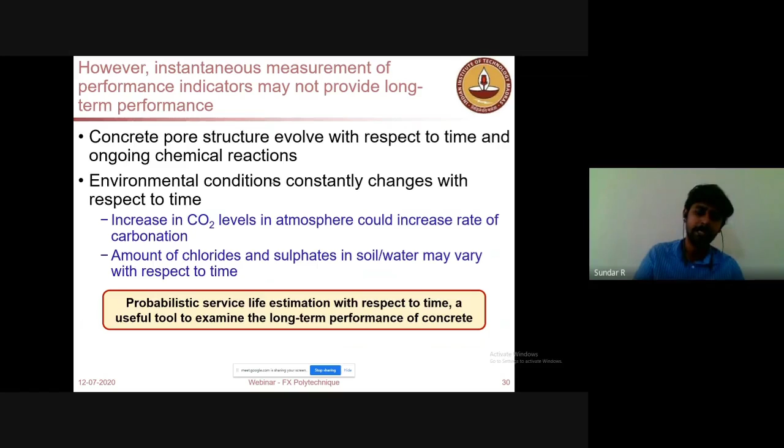For example, in chloride-induced corrosion, it is governed by Fick's second law. When you want to know how much chloride is present at a particular point of concrete, if you know the diffusion coefficient of the concrete and the time of exposure, you will be able to calculate that.

So, based on the Fick's solution, using this as a base equation, we could calculate how much chlorides can be present at the steel level at any particular time, t. So using this, we could calculate the service life of the system. That's what I'm going to say.

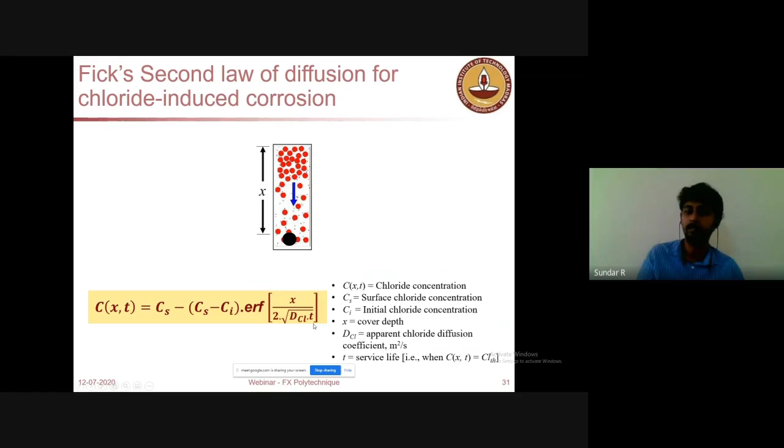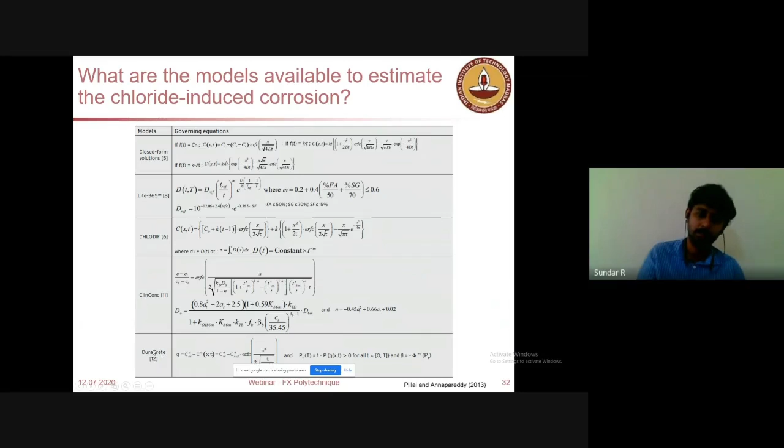And these are some of the various equations which are available in the literature, like various service life forms. Even this Life 365 is a very user-friendly software. Anyone can download and see how the choice of material and its properties can affect chloride induced corrosion over a period of time. So Life 365 is very useful, and other models are also available for determining chloride induced corrosion.

So here I would want to define that service life needs to be defined first. You should be either defining the service life based on the initiation period or propagation period. Normally initiation refers to the time taken for a sufficient amount of chloride to reach the level of the steel to initiate corrosion, so this is a longer period of time. Normally, most calculations will consider corrosion initiation at the end of the service life. But however, this corrosion propagation also can go for up to 6 to 10 years, and you can still work with this corrosion propagation period for extending the service life.

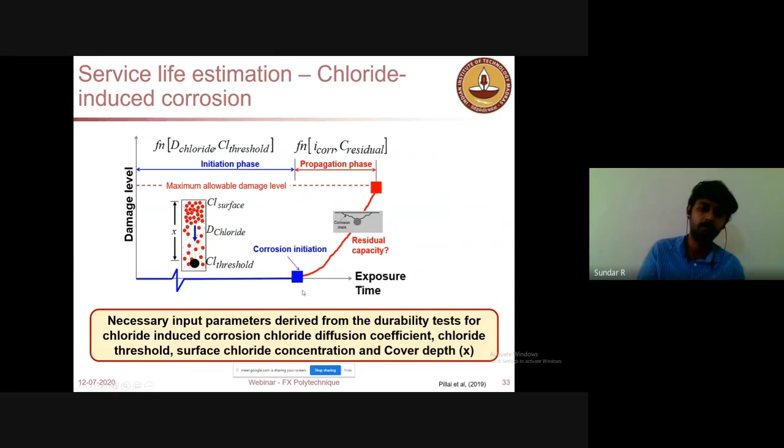But to always be on the conservative side, corrosion initiation has been considered as the service life of the structure. So from here, whatever I say as service life refers to the corrosion initiation that has occurred in the concrete structure, either due to chloride or carbonation. This is the service life that I am going to define from this slide.

So we did a study where we made 6 concretes with ordinary Portland cement, with Portland Pozzolana cement, that is PFA, and LC3, which is a ternary blend of limestone and calcined clay. We made 2 different concrete grades, and we took durability data from the concrete, like diffusion coefficient, and calculated the aging coefficient that will give us the pore structure evolution over a period of time.

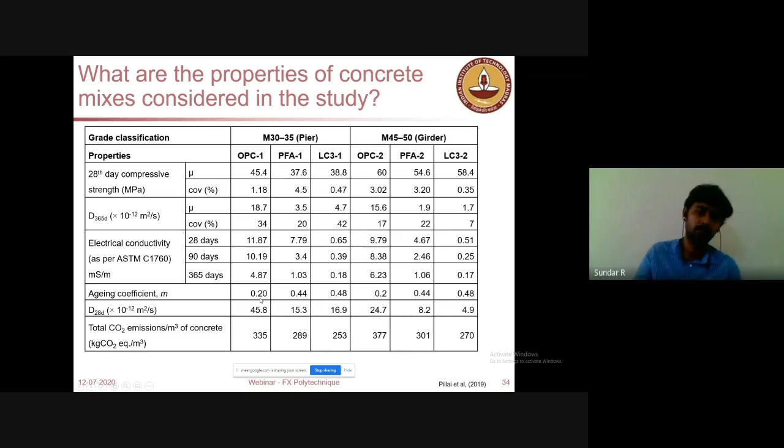If you calculate the diffusion coefficient, this is how we calculate it: we take powder from the concrete at the surface and measure the chloride levels until the steel interface. Like if you have a cover depth of 25, you take chloride at every interval, and we calculate the diffusion coefficient. Similarly, this is the chloride threshold, the amount of chloride required for initiating corrosion, which has also been calculated based upon the corrosion test. So these two are the more critical parameters governing chloride induced corrosion.

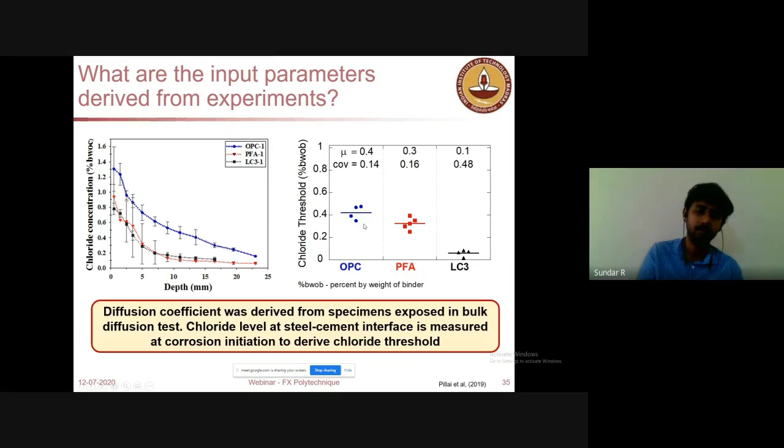Based on that, this is the input parameters that we used for calculating the service life. If you know the diffusion coefficient at 28 days, and how much surface chloride concentration is present near the concrete - that may be either from the water around the concrete columns or piers in the sea, or it may be airborne chlorides present 800 meters or 1 kilometer away from the coast.

That is the surface chloride concentration at the level of cover of the concrete. And this is the aging coefficient, which accounts for changes inside the concrete with respect to the pore structure over time, consistently changing this diffusion coefficient with respect to time. So this is at 28 days, and our aging coefficient will change the diffusion coefficient from 1 to 50 years or 100 years, whatever we want to calculate. And chloride threshold will be a constant value.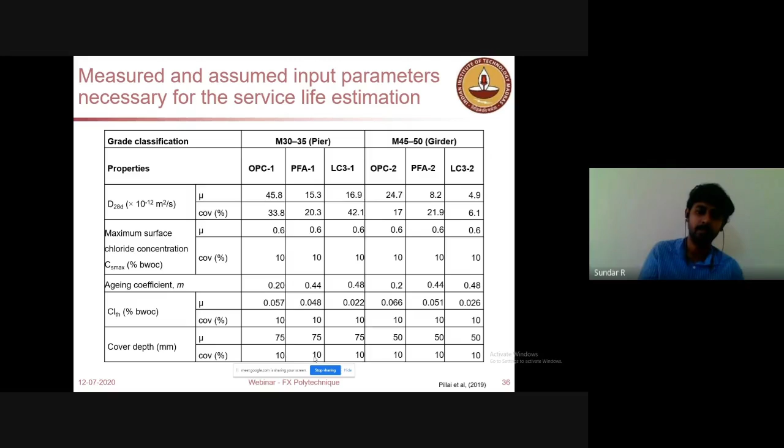Similarly, we have cover depth - every service life calculation should consider a cover depth. So that is what we have been specifying. We considered 75 and 50 mm for the study. So here, if we consider a girder of a bridge...

We tried with 3 different binders, and we saw that under chloride-induced corrosion, the concrete with ordinary Portland cement is showing a probability of 95% corrosion initiation at 100 years. So when we want to design a concrete for 100 years with OPC, it's almost impossible when there is chloride present.

So eventually we have to look for other materials. We have this ternary blend LC3 and binary blend Portland Pozzolana cement. If you look at those two, there's only 50% chance of corrosion, so it's quite safe. If you look at 50 years as a service life, the probability of corrosion initiation is under 50%. So these are a better choice of binders for a concrete element, like a girder element to be constructed where chloride induced corrosion is more prone, such as marine structures. It's always recommended to go with Portland Pozzolana or other ternary blended systems. This has been calculated to establish how we could do durability based design.

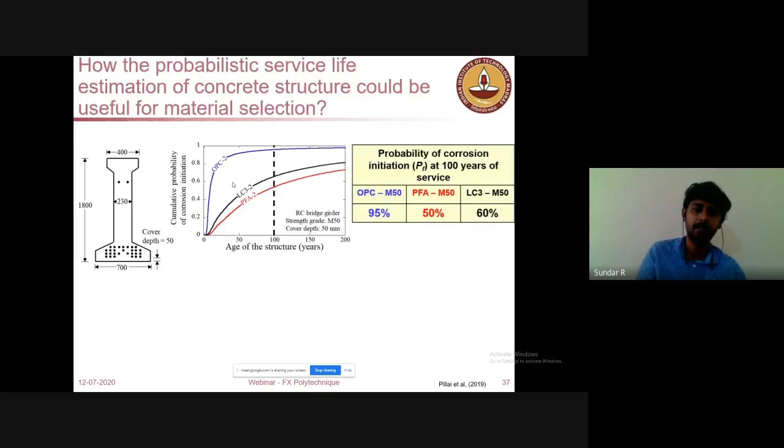Based upon this service life tool, this is a MATLAB code where we have given those input parameters discussed in the previous slide, and those input parameters were able to give this probability of corrosion initiation for a particular concrete type. With this, we had developed some nomograms.

These nomograms are like guide design charts. In reinforced concrete design, there are design charts for designing columns and beams, similar to strength-based design. If you want a structure for 40, 50, or 60 years, you should choose a diffusion coefficient that your concrete will require for achieving the necessary service life, and then you will calculate how much chloride content would be expected over a period of time based upon the location of the structure. Similarly, you'll choose how much cover depth is necessary.

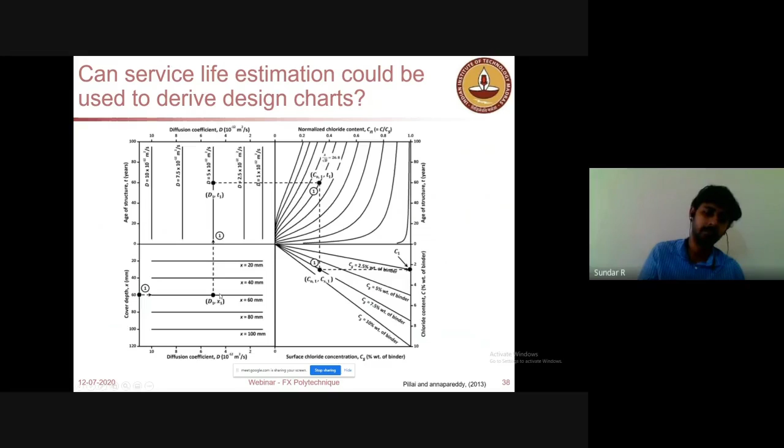For example, for a chloride content of almost 2.5, you may need a diffusion coefficient of 5 into 10 to the power minus 12, and to achieve that diffusion coefficient as well as extend the service life, you should have a cover depth of 60 mm. So this is a nomogram. You should read from here: if you have a chloride threshold as some number, and a diffusion coefficient intended as some number, you will have a necessary cover depth to achieve the intended service life. This is how we developed these nomograms based upon service life calculations.

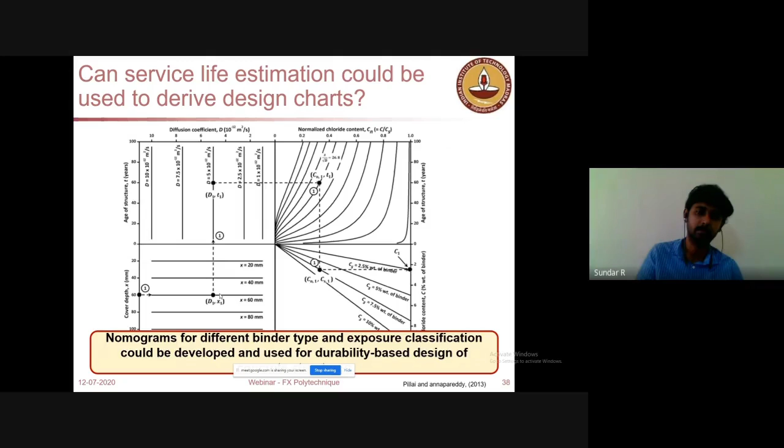Nomograms for different binder types and exposure classifications have to be made, and those will be a very good tool for calculating durability for a concrete structure over a period of time. So that is durability based design. Similarly, for chloride and carbonation induced corrosion, this could also be adopted.

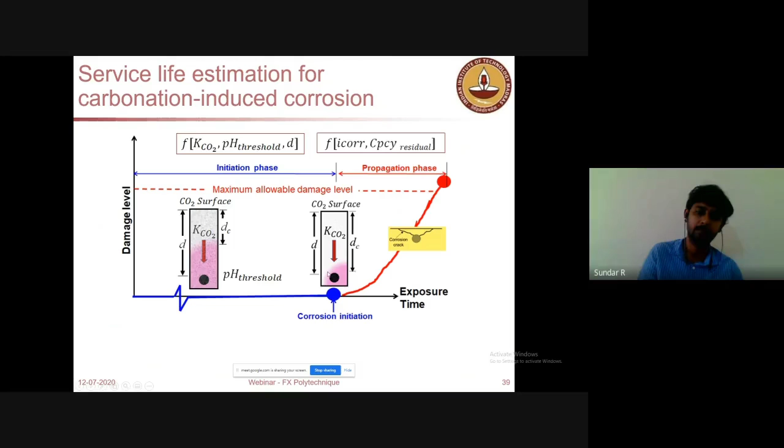Here the critical parameter will be the carbonation coefficient. To calculate the carbonation coefficient, you need an accelerated test or natural test. For different binders, you have to calculate this carbonation coefficient, and then determine the corrosion initiation time, the time taken for the carbonation front to reach the steel. This might indicate a higher possibility of corrosion.

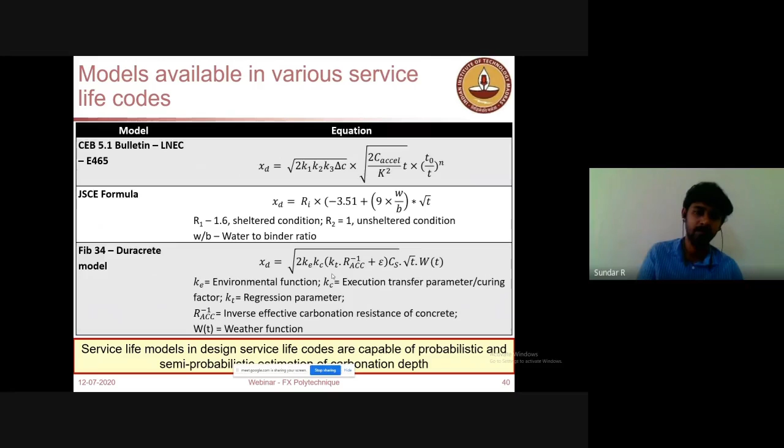This has to be calculated for carbonation also, and these are some of the models available for carbonation, which could eventually be modeled as I showed for chloride. We can generate design charts for carbonation induced corrosion also. Semi-probabilistic models or deterministic models can be developed using these expressions given in the codes and service life expressions.

So finally, what are the advantages of this performance-based specification? Depending upon the need, if it's a chloride rich environment, you will go for a member or concrete which is suitable for that. That can help you achieve the owner's expectation regarding the structure in terms of durability.

We have a lot of unique materials now, different material combinations, and a lot of expertise in this area. Combining all these, we are going to provide performance based specifications that will be very useful in extending the service life of the concrete structure, or even helping the concrete structure have no repair during the service life.

So a more durable product. When there is no intervention, meaning no repair during the service life of the project, then there will be no repair cost. That will eventually help you have much lesser life cycle cost, as well as much lesser material consumption over a period of time.

So in that way, the design of durability has a lot of potential to optimize the material availability as well as the cost of the project.

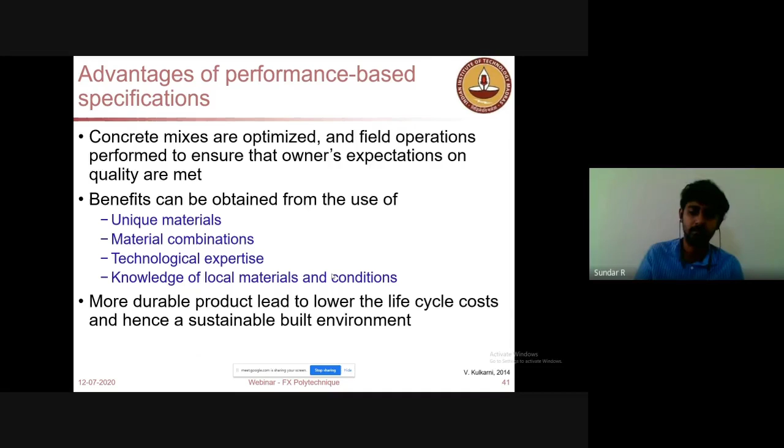So way forward, what are the challenges? This is a summary of what we discussed so far. There are a lot of materials coming up, and you don't know exactly how each material is going to behave. We don't have solid guidelines since materials keep updating. So we have a challenge in optimizing material composition and the geometry of the structure, and similarly we have a lack of knowledge on the long-term performance of each material.

Some cements like calcium sulfoaluminate or even silicate are still under development, so we don't know how they will perform in the long term. We have to develop models and use accelerated testing as an opportunity to test those materials.

Climate condition is also consistently changing, and that is affecting the natural weathering process. Concrete is naturally weathering every day, and the process is changing because of increasing CO2 content and variation in rainfall patterns. So these factors are affecting the structure.

These are huge challenges in front of durability-based design, and we have to look at the opportunities, like developing tools such as the nomograms I introduced you to. These design charts should be developed based on service life models, and we also have to revise the codes for performance-based specifications.

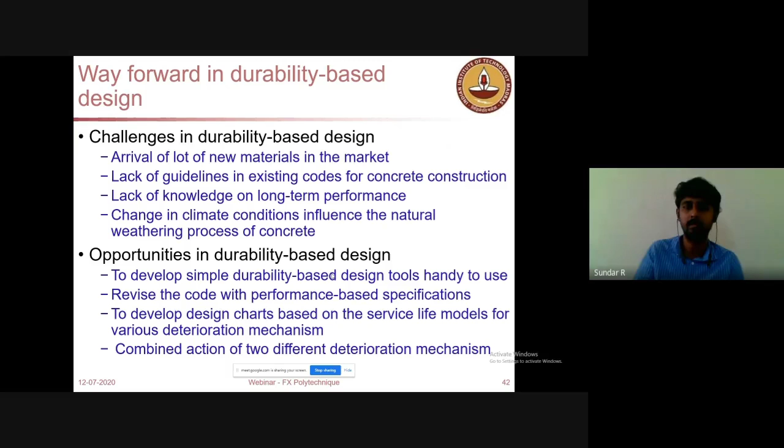You have to be constantly updated about everything—what new materials are available, what good practices are available, and what conditions of durability have to be met. This is a good opportunity to share this with you, and I am very happy about it.

I would like to thank my thesis advisor, Dr. Pillai at IIT Madras, and also Dr. Gettu, Dr. Santhanam, and Dr. Ramamurthy. These are the teachers I have been learning concrete from, and I am still learning concrete every day with them, along with all the material scientists, academicians and engineers working in the field of concrete, because concrete is a very unique material with a lot of challenges. It is governed by many principles—everything should be perfect, the material should be perfect, and the workmanship should be perfect—so that we can achieve the intended durability.

So to help us achieve the intended durability, durability-based design will be useful in the near future. All the best to everyone, and thank you again to FX Polytechnique for giving me this opportunity to present this webinar to you. Thanks.